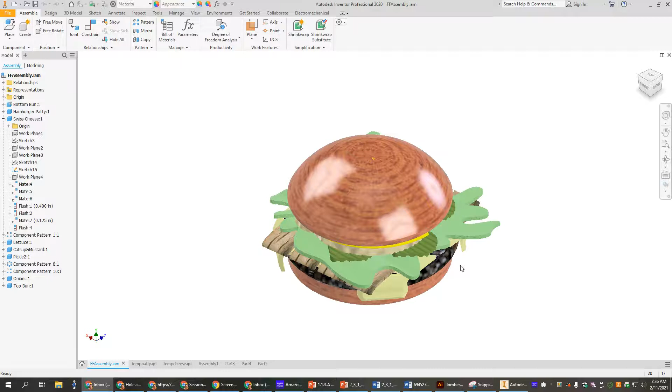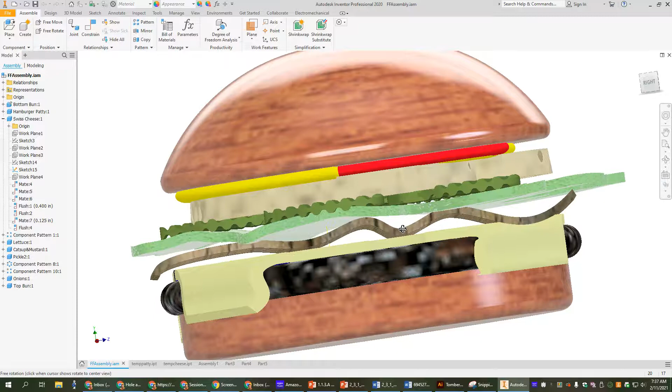All right, in our last video, we made a couple of flat items like a hamburger bun or a patty, or even a flat piece of cheese, and we practiced how to set it up so it's easy to assemble. But other times in our fast food item, like a sandwich or a hamburger, we have things with a little wave or wrinkle, like the lettuce or the bacon, or even three-dimensional stuff with grooves like the pickle. So today we're going to learn how to make a couple of those.

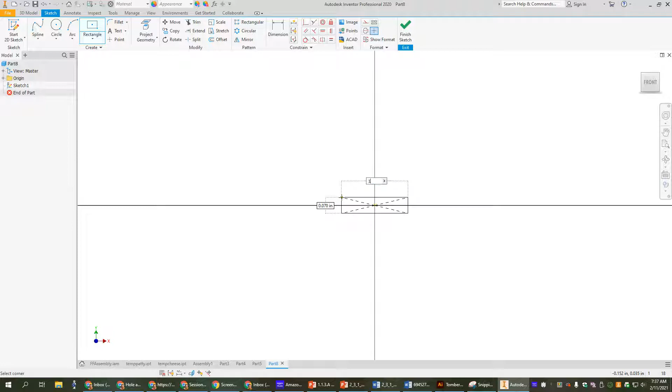Let's start with bacon. I'm going to draw the end of the bacon, like I'm looking straight at the cross section of it, starting on the side. I'm going to use that rectangle tool again, drawing from the middle. It's not super critical on this one, but since it's already selected, let's use it. We're going to make my bacon an inch wide and 1/10 of an inch thick. All right, so there's my piece of bacon.

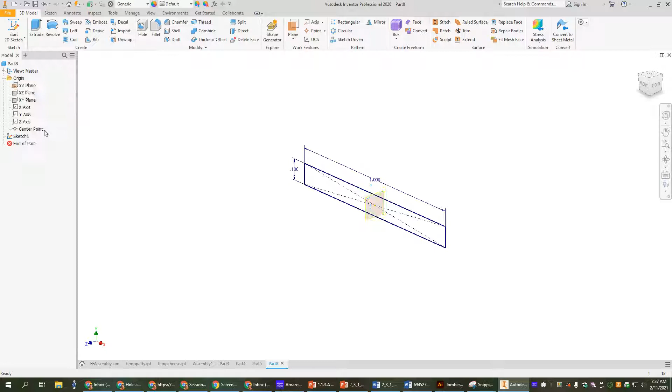We're going to finish that sketch. Now what we need to do is draw a line perpendicular to this that waves out to the side. So I'm going to go to the origin and find a plane that's perpendicular, like this one right here. I'm going to make it visible just for this video so we can see where things are, and you can see that's perpendicular to it. So now I'm going to make a new sketch on that perpendicular plane.

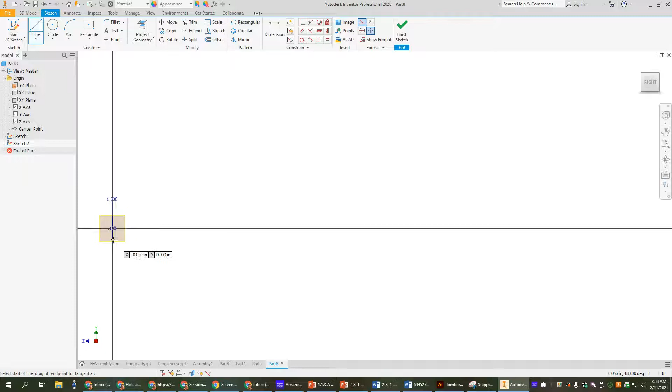Now what I'm going to do first is draw a line. I go to my line tool, and this is just a guideline that's going to help me know how long to make my bacon, because I can't tell if this is an inch or 10 inches on my screen here. I'm going to make this a construction line by clicking this little construction icon up here. I'm just going to start my line over here, doesn't really matter where, and make it 4 inches long. And now I have that 4-inch line.

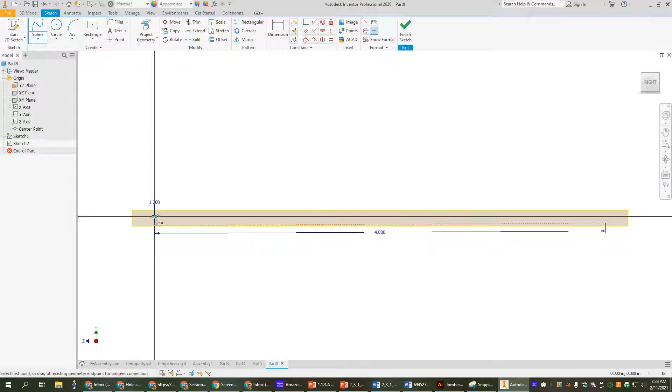You can see it down there, it's that little dotted line, and it's just for a guide, so that tells me how big things are. I'm going to turn off construction because I want to go back and actually draw. I'm going to use the spline tool now because I want the wavy bacon. So I'm going to start my spline tool right here at the origin, and I'm just going to give my bacon some wave. I think we've got it good enough.

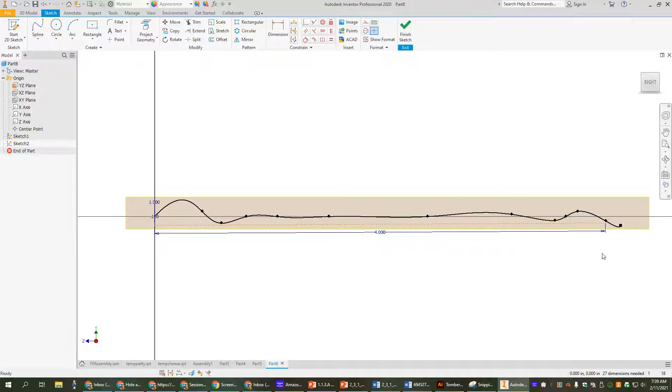We finish it off. Now sometimes if you get too much of a sharp corner, the spline doesn't like it, so I'm going to straighten that guy out just a little bit down there at the end. Okay, looks like it's good. So we're going to finish that. I'm going to go ahead and turn that visibility off again so we can see what we're doing a little bit better. And now you can see we have the end of the bacon, and we have the path that we're going to follow when we do a sweep.

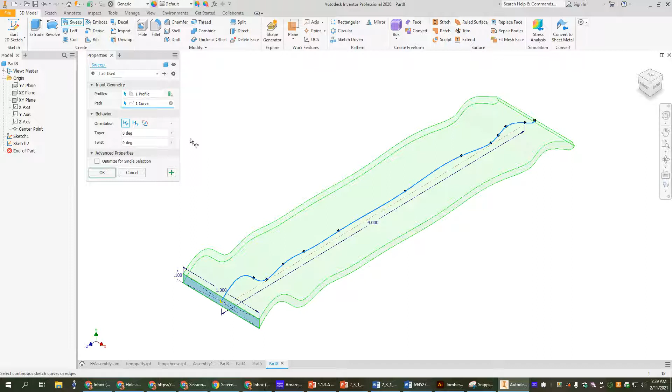So this is my profile, and there's my curve. A lot of times it'll just find it for you, but if it doesn't, the profile is the rectangle, and the curve is the spline. And there's my piece of bacon. All right, so there's bacon. Of course, you can select some sort of color that makes it look more like bacon, but there you go. We'll let you play with the color.

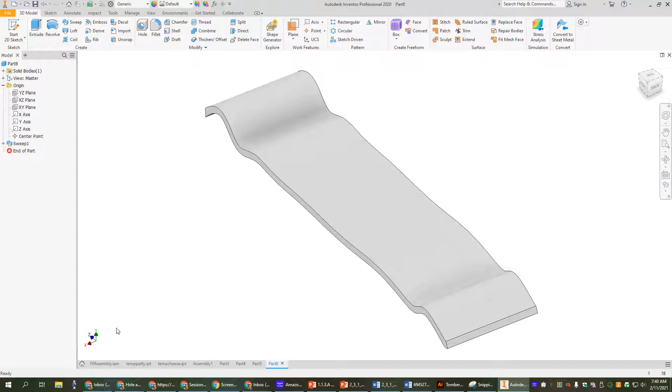So let's go draw something else. Let's go draw the lettuce. We're going to do basically the same thing with the lettuce. Okay, so we're going to go back to home, make a new part. Again, we want to make kind of a wavy piece here.

And so I'm going to go with a new sketch. I'm going to start from the end, just like I did with the bacon, using my same rectangle tool. Oops, gotta choose rectangle. And start it here at the origin. This time my hamburger, remember, was 4 inches wide. I want the bacon or the lettuce to be about the same, so this one I'm going to make a little bit bigger because it hangs off the edge just a little bit.

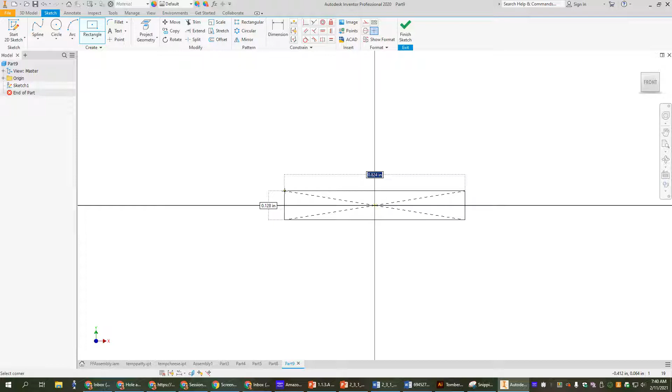So I'm going to make it 4.5 inches. Lettuce is really skinny, maybe even skinnier than bacon, but we got to make it visible, so we're going to make it 0.1 again. And we're going to finish our sketch.

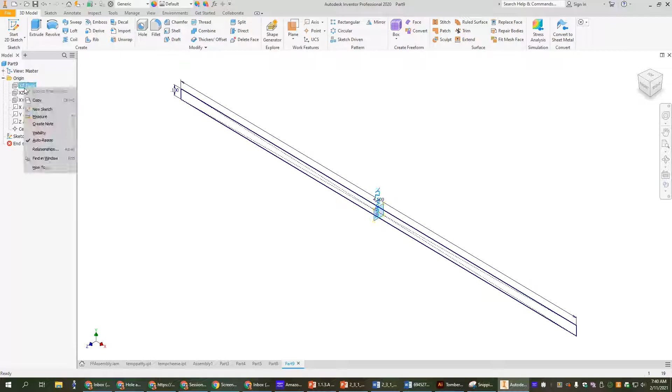Now we have the same thing just like we had before. We have to have that perpendicular plane, just like we did before, so that's this one. I'm just going to make a new sketch. I'm not going to make it visible because I think you guys can tell what we're doing.

Now we have to draw this out. Again, I want it about 4.5 inches. You can either kind of just guess what you're doing, or if you want to go make another line like I did last time, just to give you a guide. So I'm just going to make me a line along here, start it here, and go out 4.5 this time. Okay, and there's my dotted line.

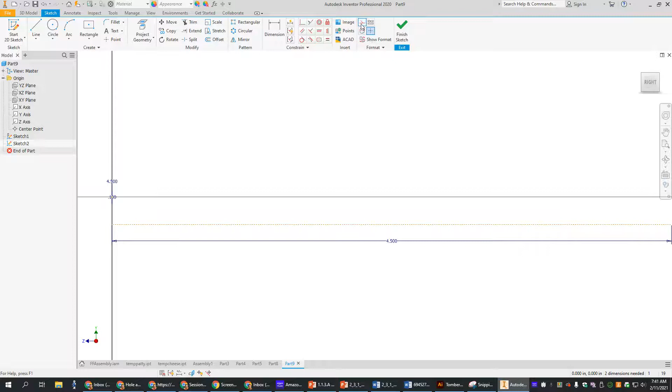Turn off construction so I can draw my actual spline for my curve. Now I don't think lettuce is quite as curvy as bacon, so we'll just make 2 or 3 little curves in here and call that good. Okay, so now we're going to finish that sketch.

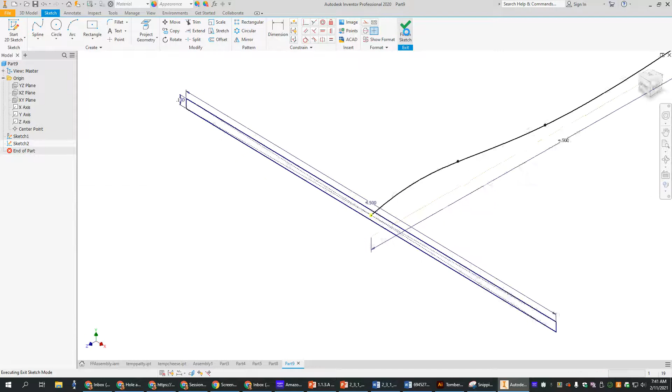We're going to go to sweep again. There's my profile, there's my curve. It found them both for me because Inventor is pretty helpful. And now I have this kind of wavy piece of lettuce. But it doesn't look much like lettuce, does it? Because it's kind of going crazy.

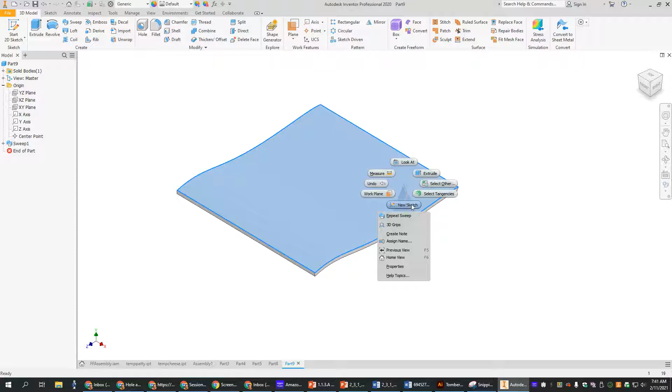So now we want to draw a new sketch on top of here. But if you right click, sometimes it won't work because it's a curve, so sometimes you have to go get that plane. Now if it works for you, that's great. It looked like it was going to work for me, but look, this plane right here is to the top. So we're going to go get this here. We're going to make a new sketch because we've got to cut this to look like lettuce.

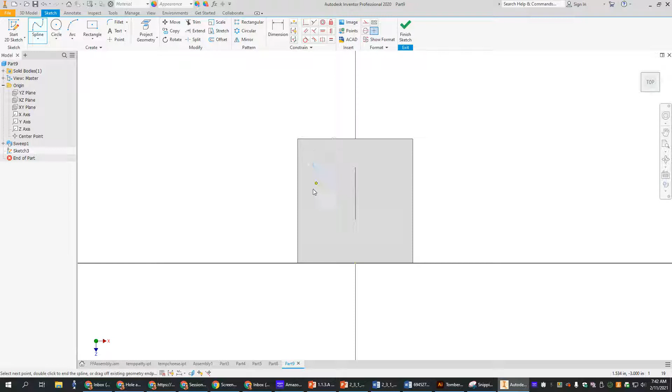So we're going to go make a spline like we have here. Get our spline tool, and this is the one where we're going to make the kind of crazy looking shape. So we're just going to go around the edges here. The lettuce doesn't follow a square or circular shape, it's just kind of a weird shape. Okay, so there's a lettuce. It's weird because the lettuce is curved, so it's like you lose some of that.

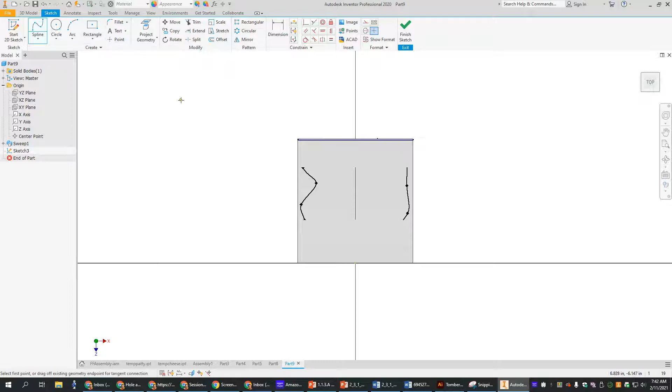But then we have to make a rectangle, and we just need to make this rectangle bigger than anything we have. Just start it here, it doesn't matter how big it is, it's just got to be bigger than. So then we have that bigger than, and now we're going to finish this sketch.

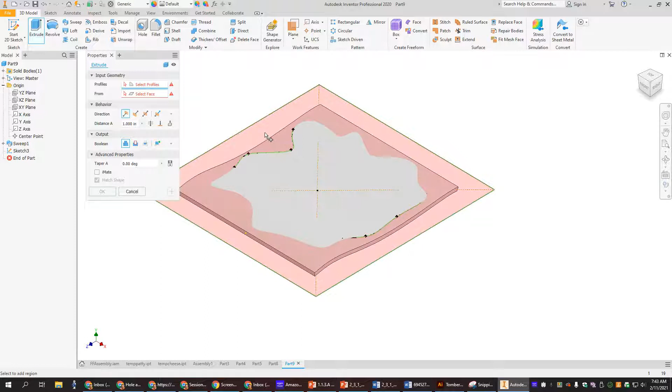Now what we're going to do is we're going to extrude this piece on the outside, so we leave the stuff in the middle. Normally we do this in the middle, we're going to do this on the outside. So we're going to click that, we're going to cut it, and we're going to cut it in both directions because we kind of drew in the middle. So we want to cut it off so everything disappears. And then we say OK.

And look, there we have our lettuce. It's got a little curve to it, it's got a weird shape to it. And now what I do is color it green, and we've got lettuce. Okay, so I'll let you guys color it.

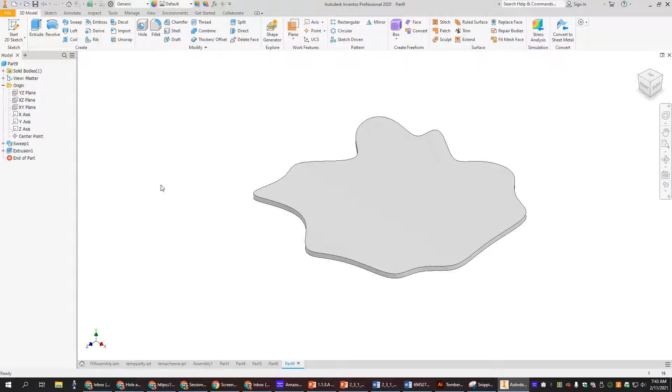And then our last thing we have to make is some pickles. So let's go make a new part. Again, we're going to draw a pickle. I'm going to look down at the top of the pickle, so I'm going to draw here on the top. Now the pickle, you can make just a round pickle, but I think pickles are a little bit odd shaped. Now again, how big is my pickle?

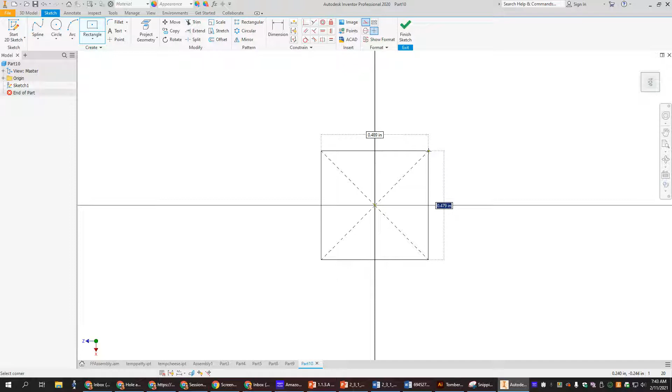If you don't know and you're not sure, make that rectangle. Just make a construction, just click construction, do your rectangle. Maybe we want 1 inch pickles, so we'll just put a 1 inch construction square just so we can have a guide.

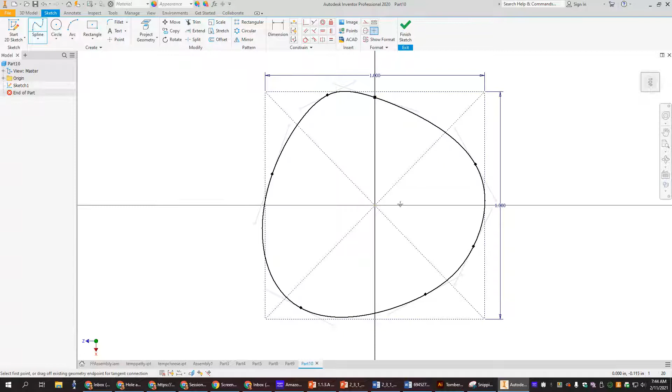And then we can get our spline, and we'll just start here. Our pickles, you know, they aren't really weird shaped, they're kind of round because they come from a cucumber, right? There we go, so that kind of looks like a round pickle. So we're going to finish that, and we're going to extrude him, probably not 1 inch.

Maybe it's a little bit thicker than the others, so let's make it 0.2. Well, that looks pretty darn thick. Let's make it 0.15 instead. Good enough.

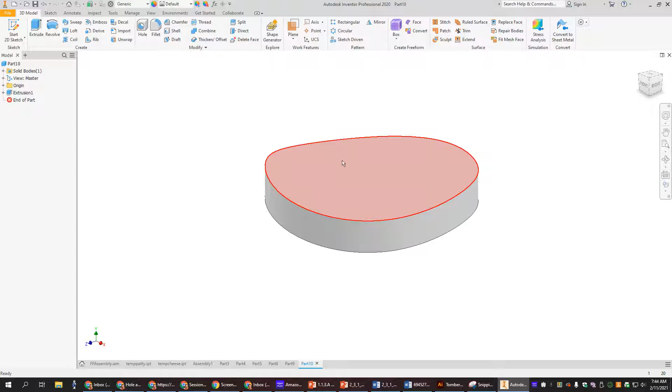Okay, so now here is my pickle, but I have to put those grooves in it. So again, I need some sort of plane that's cutting through, either that one or not that one, one of these that cuts through it like that. Doesn't matter which one, let's just pick this guy. And we're going to make a new sketch.

Now that we do that new sketch, we're going to put some circles on it. So we're going to put a circle. We want the circle to be halfway through, so let's call this, I don't know, let's call it 0.075.

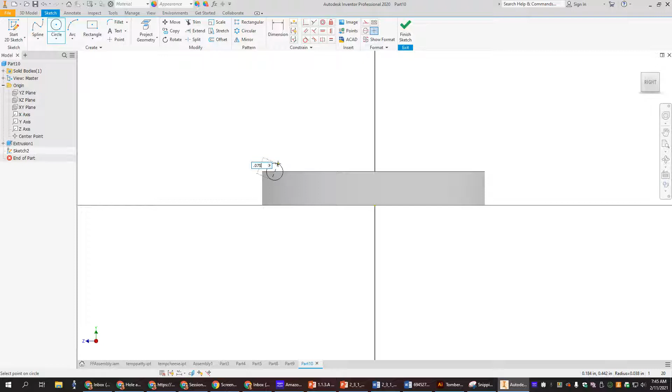Okay, so there's one. And then we're going to do another one on the bottom. They don't have to line up perfectly. We'll make him the same size. And that's it. Okay, now we have to cut those.

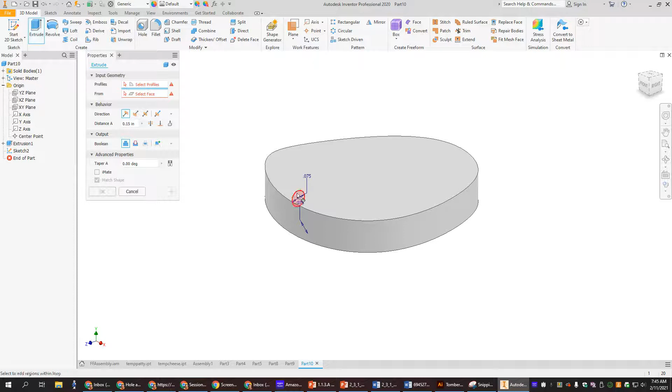So we're going to extrude that, and then we're going to extrude that one on the bottom. So we have to kind of turn it over so we can see him. We're going to extrude that.

Now again, we want to cut, because we're trying to cut those grooves. We want to cut both directions because we're in the middle. And then we just want to cut a long way. Doesn't really matter as long as it makes it to the outside.

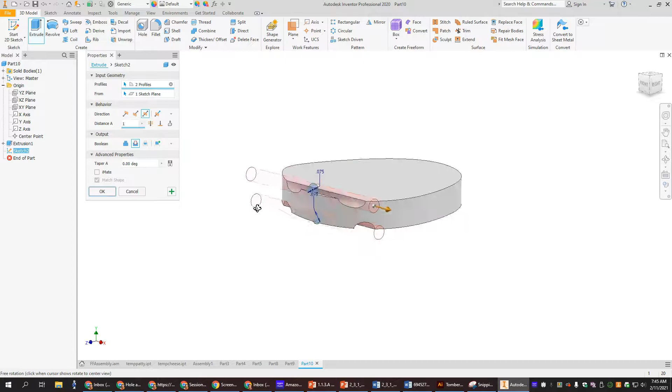Right, look, there's those grooves starting to show up. And then we say OK.

All right, so now we have to cut along this thing. We're going to pattern that. Okay, so we're going to do a rectangular pattern. So we're going to do these features, and then we have to look for a direction.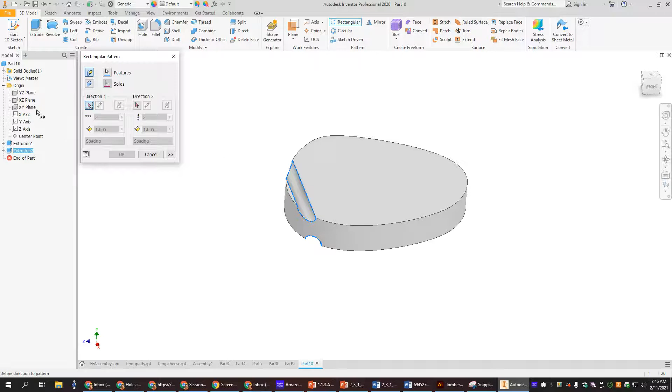So again, we kind of have to look at one of these planes, so we get the one that's perpendicular and click that. Okay, so go to the perpendicular plane, click it, and you can see how my stuff's showing up over here on the left. Now we want it to go to the right, so we're going to flip it, and we don't want it to go that far.

So maybe, you know, like 0.15, about twice as far as our groove was. Okay, that looks pretty good. And then we need a bunch of them.

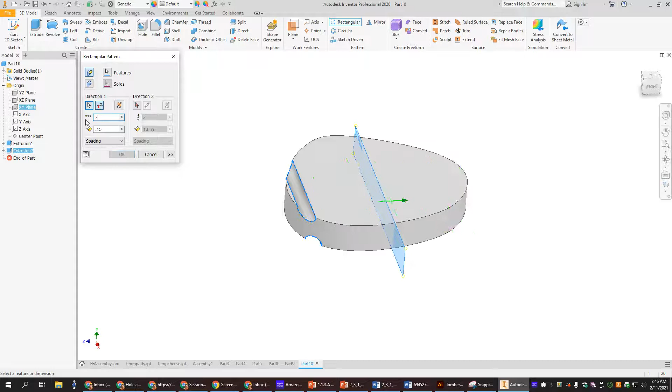And we don't know how many, so let's just guess 10. Oh, 10's way too many. But it doesn't matter, it's just going to cut nothing out of nothing. So we could actually do more than we need to, but that looks like enough. And we're going to say OK.

And look at there, we have all kinds of grooves. Now look, we didn't cut it quite far enough, so we might have to go back. Remember this first extrusion that we did? We have to edit that feature.

Oops, that wasn't the one. Cancel, that was our second extrusion, sorry. Edit that feature, and then that cut, we only went an inch. Let's go just a little bit farther, like 1.1, just to make sure we get far enough. And now look, that little piece went away.

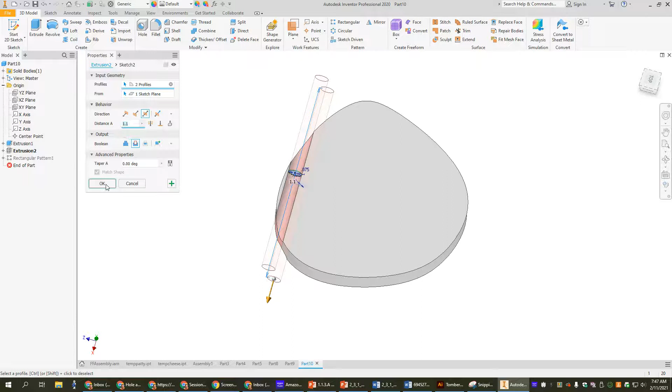So you can always go fix if you make a mistake. And then it's kind of rough on these edges, right? We don't have the curve. We got a curve here, but not here.

We could do a fillet, we could do a fillet right there. Now that's way too big, so let's just adjust this. And again, it's just kind of guess, 0.05, I don't know.

That looks pretty good. And then you can click it on the other side and see how it starts to round off that pickle. You can make it as fancy as you possibly want.

You can round these edges too if you want, right? It gets a little crazy in some of those. Okay, but look, it starts to round off that pickle.

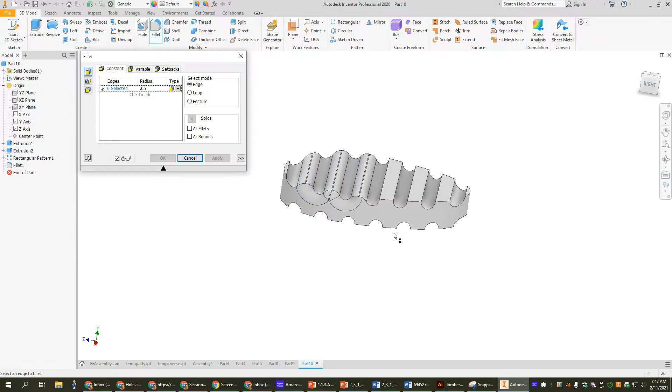I don't know if I like those ones on the edge, so I might not do that. But these ones in the middle I think are really good. See those round parts? I think that looks better than these squared off parts. But none of it is required. Make it as nice and fancy as you want, or make it as simple as you want. It's still a pickle. And that's it.

Color it green, or whatever color pickle you would like to have on your sandwich, and you are all good.